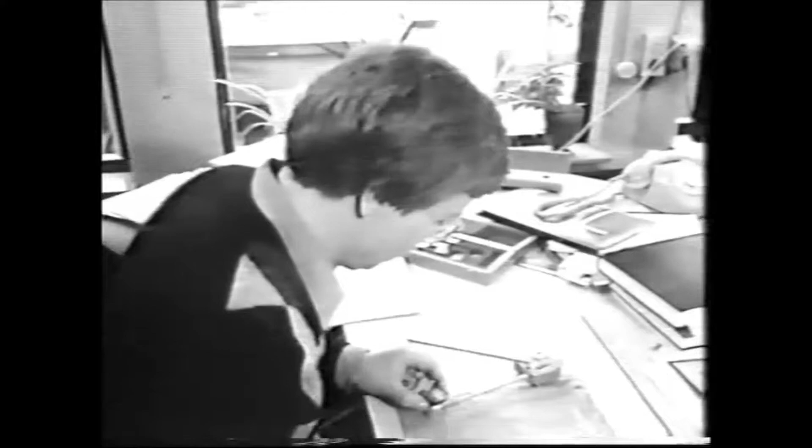In 1983, Daewoo Shipbuilding and Heavy Machinery Limited, whose yard in Okpo Bay on Koje Island, South Korea, is well known for constructing large industrial plants, completed 28 modules destined for a petrochemical plant in Al Jubail, Saudi Arabia. The modules were designed by the contractor Fluor of Irvine in California. Stability calculations were checked and rechecked. Jan, I think the next item on our agenda is your... At a very early stage, too, meetings were held to discuss all aspects involved in the project.

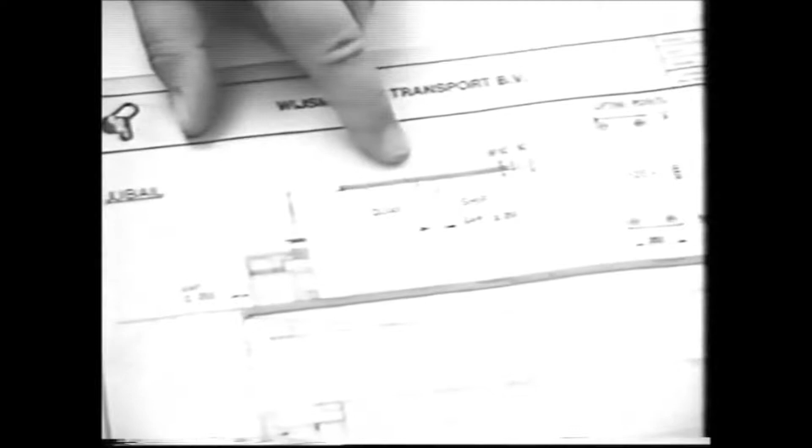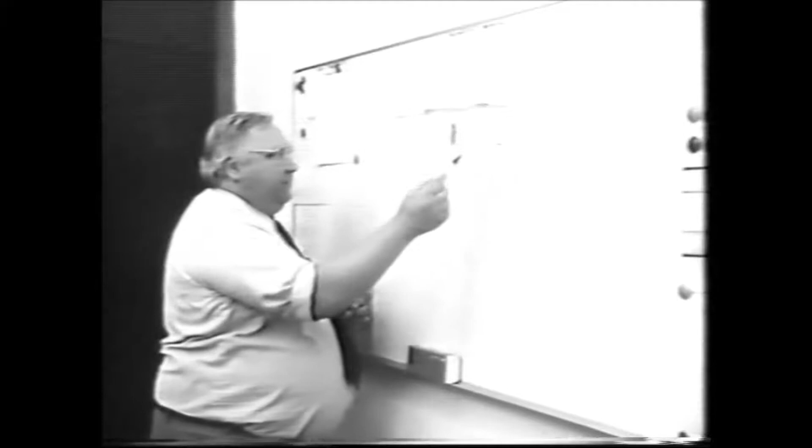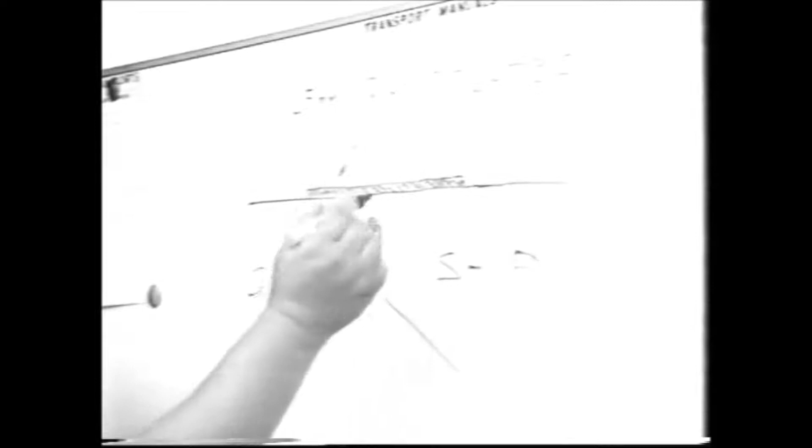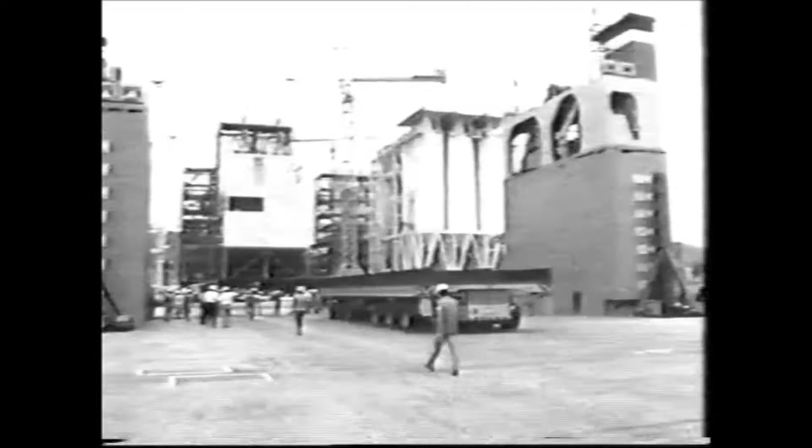Well, actually, it's working very simple. Wijsmuller could use a very simple loading and discharging ramp because of Super Servant's excellent ballasting capabilities. Very simple. Superintendent Jan Arnoudse explains to Kent Goodman of Fluor how this ramp will work. You have the quay, the fender, and the ship. Because of the small gap and the possibility, because of our good ballasting system, to stay level with the quay, we only need 25mm ramp plates, which will be connected to the ship by small steel straps welded to the plates and to the ship. Onto the deck, the transporter can be driven off without delay. Module number 4 is brought aboard.

This was a small film about the first self-propelled heavy lift vessels, submersible heavy lift vessels, developed in the engineering departments of Wijsmuller Group.

But the history goes back much longer, to the 1600s, when we used the so-called sea camels in Amsterdam. Big sailing vessels arrived, waiting to enter the port of Amsterdam, and they used the sea camels, a kind of dry dock connected around the sailing boats, which was then deballasted, and then it could be rowed into Amsterdam and thereafter discharged.

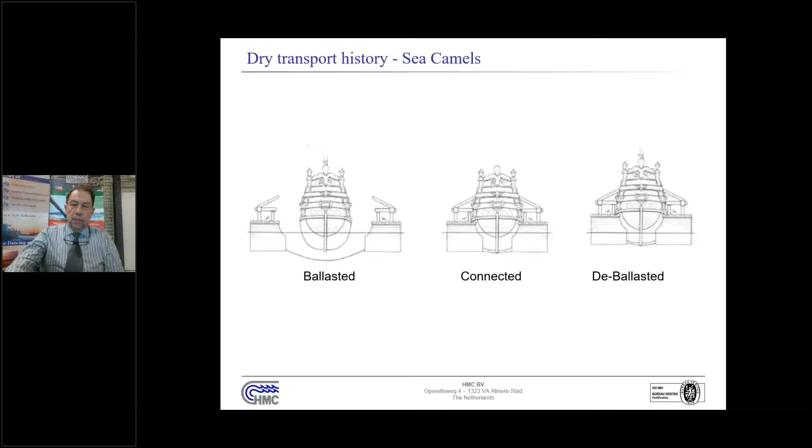That's the reason why ITC from Haarlem developed the so-called bottom reaction barges, and that generation was also called the sea camels. Bottom reaction barges are barges that are afloat, then submerged by ballasting in the stern, and they got their stability while resting with the stern on the seabed.

Then you bring the cargo above it, and you start to deballast again. You get the stability from the waterline in the front and the waterline of the cargo, and then you pick up everything. The picture shows an example of a ship unloader being loaded in this manner. That's the real first generation of semi-submersible barges, but they always had to be towed.

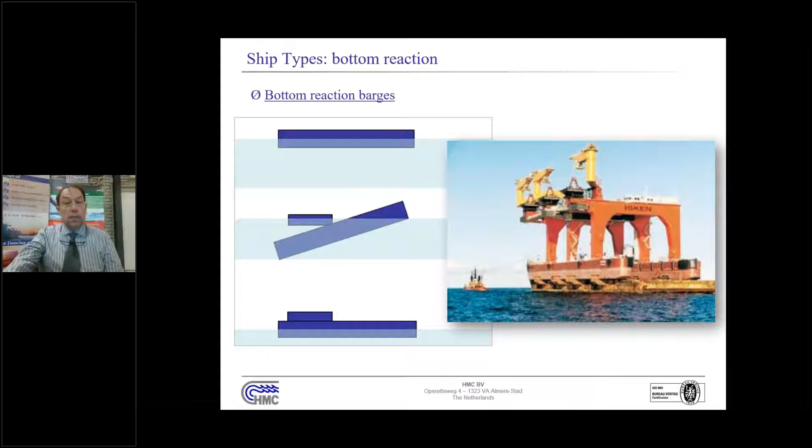Then after that, in IJmuiden, we designed the Ocean Servants. These are barges which had a small propulsion to assist the tug, but they always had to be towed over large distances. In the front you have a big ramp where you could beach the vessel and roll off all kinds of cargo. A special feature was that it had a stern casing and two bow casings, which makes it possible to submerge it horizontally, irrespective of the water depth. That gives a lot of flexibility.

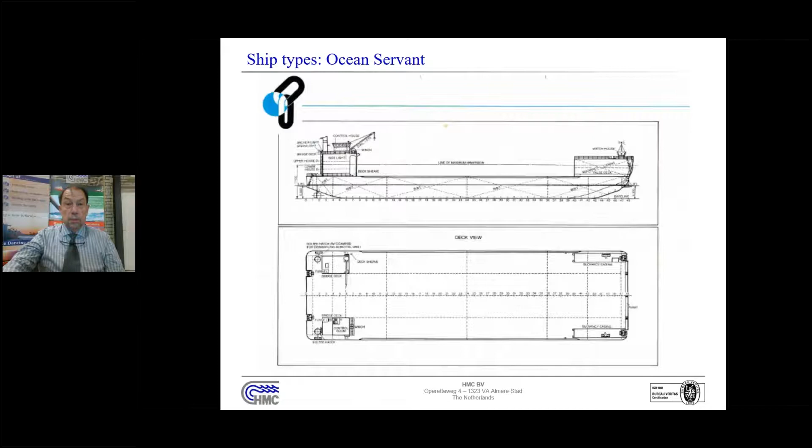After the Ocean Servants, we developed the Super Servants, the self-propelled versions. Among the dry transport carrier types developed after that was the open stern: ships you can reach from three sides, with the bridge on the bow. Then there are, as far as I know, only four built of the tankers. They were used as product tankers when not in heavy lift mode, and in heavy lift mode the tanks would be cleaned and they could carry heavy cargoes.

Next to that, we have the converted tankers and bulk carriers. Those ships were converted to heavy lift ships, and there are still vessels sailing, like the T class of Dockwise, still used as converted tankers. And the fourth type is the dock type, multi-purpose type of ship.

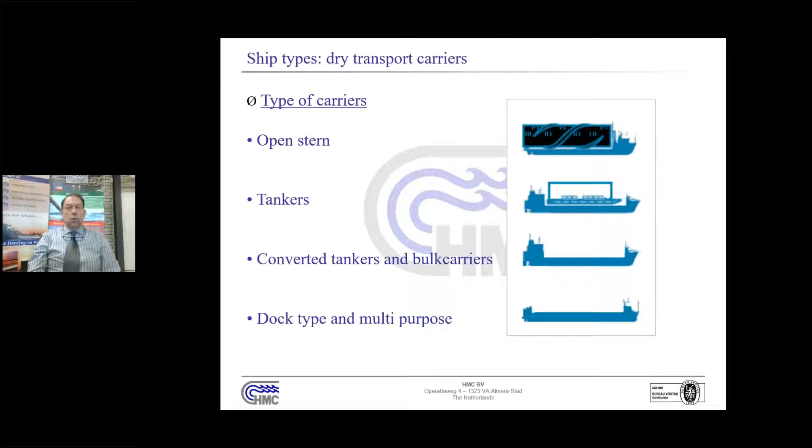This is the general arrangement of the Super Servants. When you submerge, you get your stability from the waterline area at the bow and the two casings at the aft. Those vessels are still operational. The Super Servant 4 is still transporting yachts. The Super Servant 1 is also not demolished yet; it is a rock dumping vessel. So those vessels still have a function in the world.

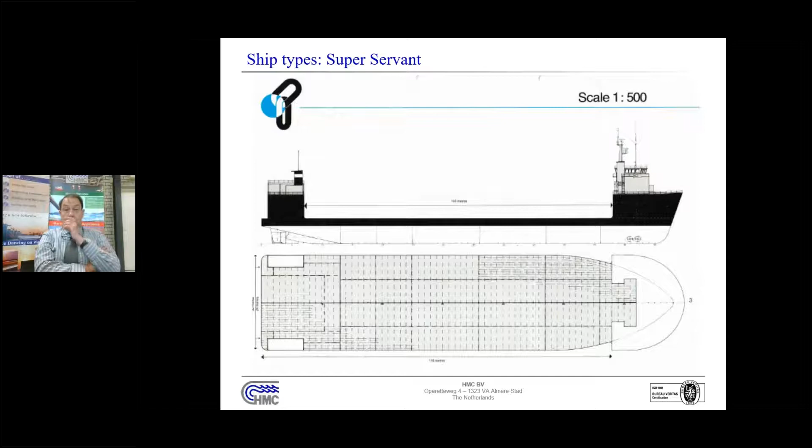After that, we came with the new design, the Mighty Servants, the larger generation. The thinking behind this design, shown on the next page, is that for carrying light cargo you have a U-shaped hull, so you don't need all the deadweight nor the stability, and you have a gentle motion. For real heavy cargoes like gorilla type rigs or semi-subs, you have the wide waterline with a lot of stability.

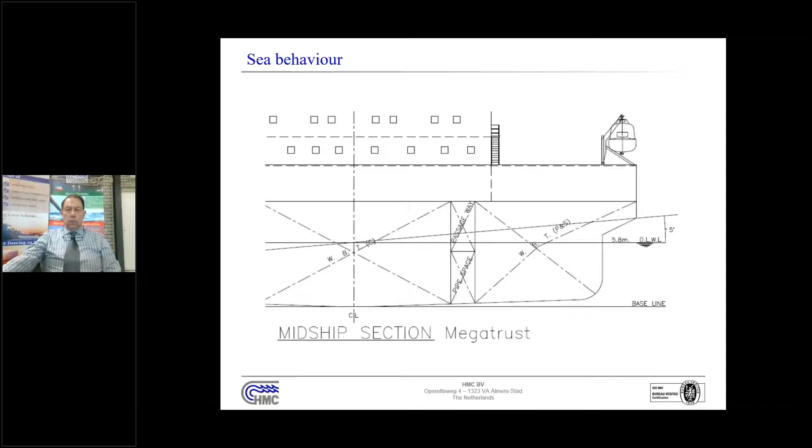Of the Mighty Servants, Mighty Servant 1 was widened and brought back to the U-shape main section. The Mighty Servant 2 unfortunately sank in Indonesia, and only the Mighty Servant 3 is still operational in this shape.

Another type of heavy lift ship is the unmanned barges. This is the example of the Gavea Lifter, operated by Fairmount in those days. That was the highest capacity barge with 50,000 tons of deadweight, and we did a lot of work with that barge using the tugs from the Fairmount fleet. In this case we brought two big rigs from the US Gulf to the Arabian Gulf.

Underwriters are not very happy with the towing. That was also the reason that the self-propelled ships were very popular. In this example, you see the Ocean Orc loaded with a big rig, and basically only these kinds of operations are feasible because you can use the uplift from the cargo, and that contributes to your stability and your stability area.

So basically, for every transport, you have to prepare a transportation manual, which in fact replaces the stability book in that sense. This was also a very nice adventure for myself. It was the CB Venture. It was a converted tanker operated by ITC, and I was sent out by the big competitor Wijsmuller to see how this loading operation, the first one in Quebec, was done and if that was successful.

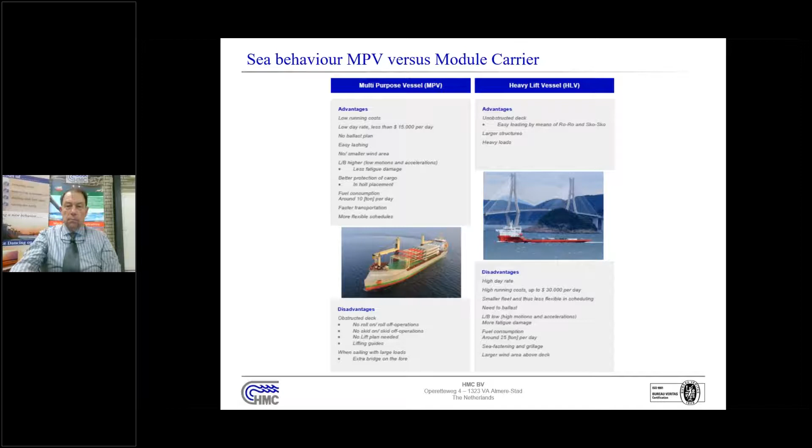In this calculation, for a significant wave height of 4.4 meters, you can see that the multi-purpose vessel has a roll acceleration of a little less than 1 degree per second squared, and the heavy lift vessel is about 6 to 7 times higher, with high accelerations. And those ships with an L over B of 3 come very close to the rule of thumb of the default motions. So I always prefer to do as many motion response calculations as possible, but sometimes we fall back on the default motions.

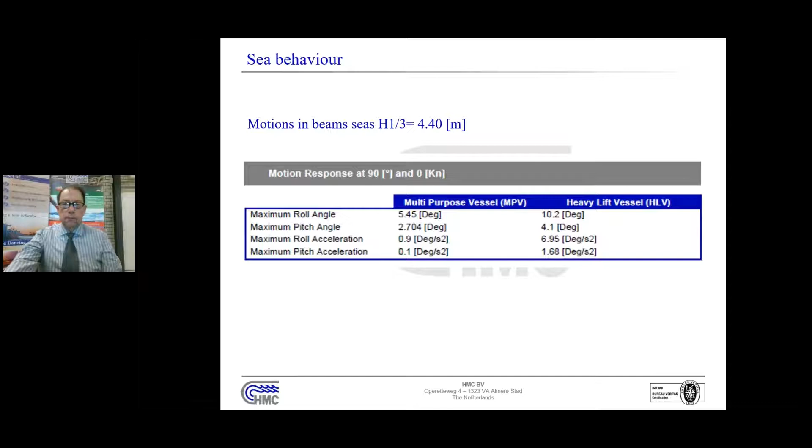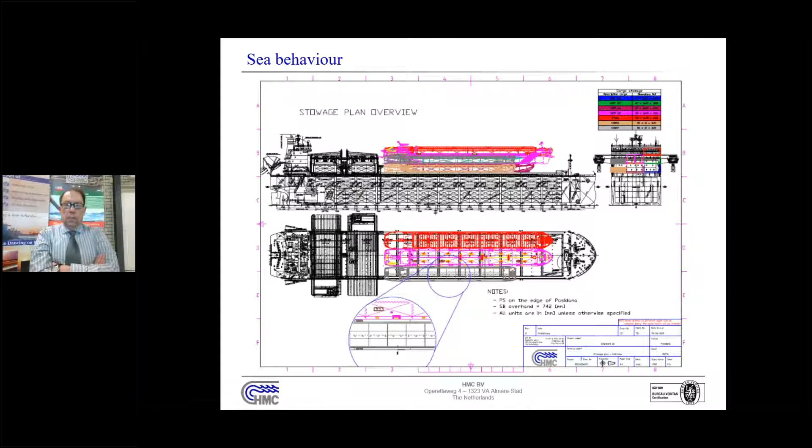Here is another type of transport which we did not last year, but the year before: transportation of cascos, inland hull cascos, on a bulk carrier. It appears that the motion responses were quite okay. In this vessel, we did it in concert with MARIN. We could monitor the motions and follow the ship every day, and those data are still being analyzed. Here you see that the vessel entered Rotterdam safely.

What happened here two years ago: the client normally transports bulk cargo, and they gave us accelerations, especially the roll motion, of 6.08 meters per second squared. Also, calculations were done by IMO class. But if you choose the default rules of DNV, which were based on the Noble Denton rules, basically you're not allowed to use IMO calculations. You can only use that for loads up to 100 tons.

When you do motion response analysis, in this case diffraction theory, we came up with 5.2 meters per second squared. But since the vessel was equipped with a double engine room, you can apply heading control. That means that you can reduce your significant wave height by 60%, and then you come to a motion of 3.44 meters per second squared.

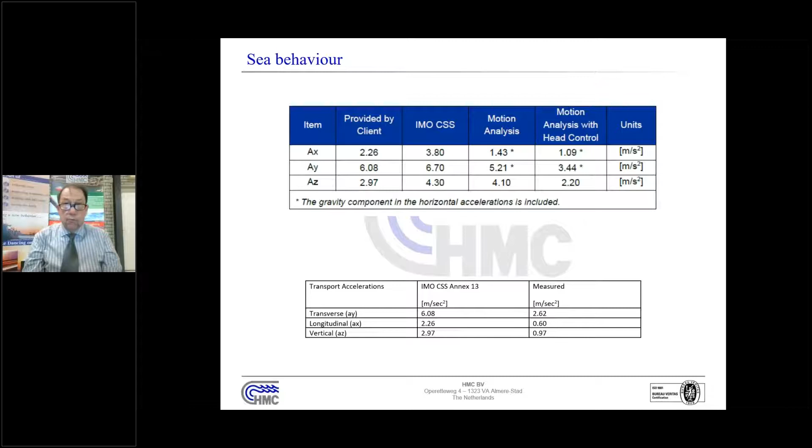As I said, we also measured it, and the whole trip we had a transverse acceleration, combined acceleration of 2.6 instead of the calculated 6.08. And according to our measurements, the roll angle we had during this period was 15 degrees. So it's quite a lot.

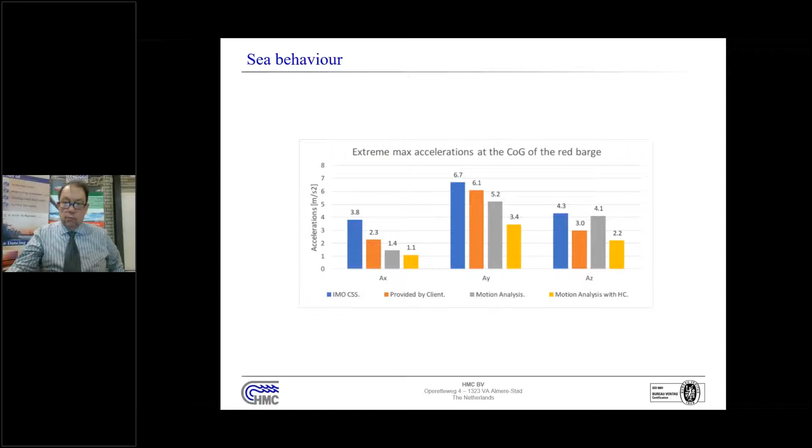We are now working on integrating these environmental conditions with motion responses to prepare a very good safety system to inform the crew more or less continuously.

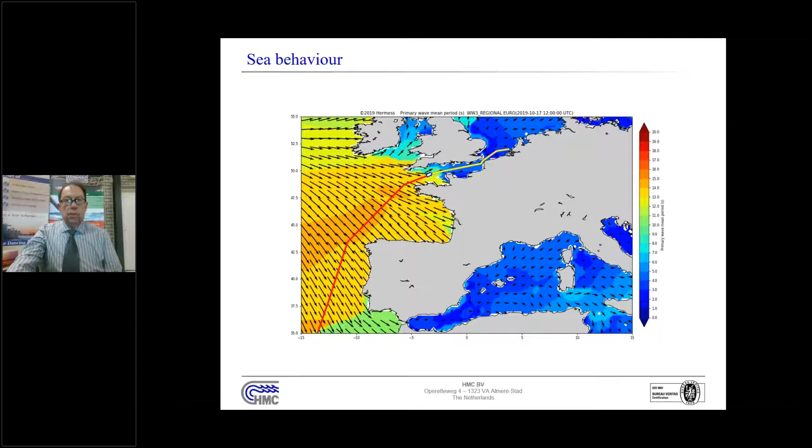Another issue with these kinds of vessels is the structural integrity. The module carriers have a small depth, I always say it looks like a chocolate bar, and you put a lot of concentrated loads on the deck, so structural integrity is a big issue. So what we do is model the ship in finite elements and look at the deflection and the hogging and the sagging.

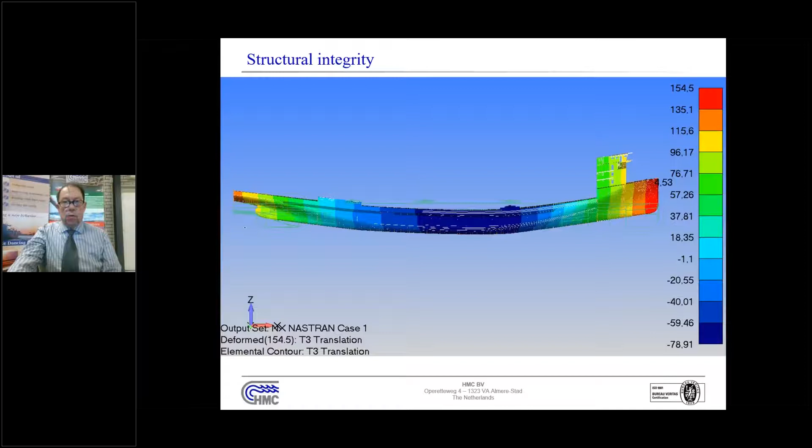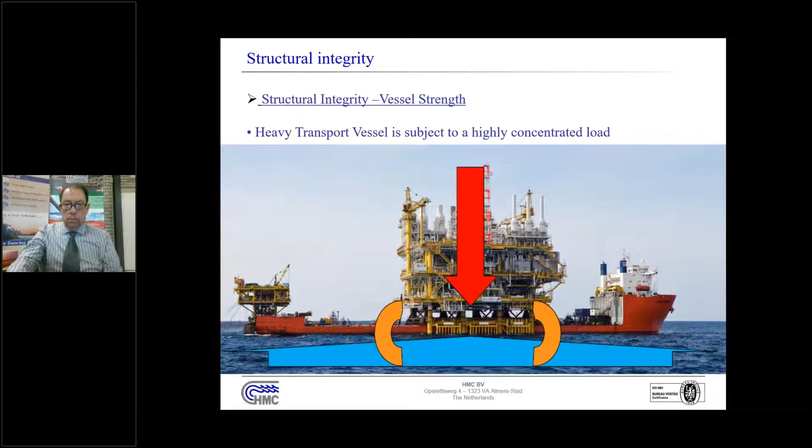If you compare it with, let's say, a merchant marine vessel, a container vessel, where the load is quite nicely distributed over the ship, and the uplift is also very well distributed, the cross section can be built less heavy.

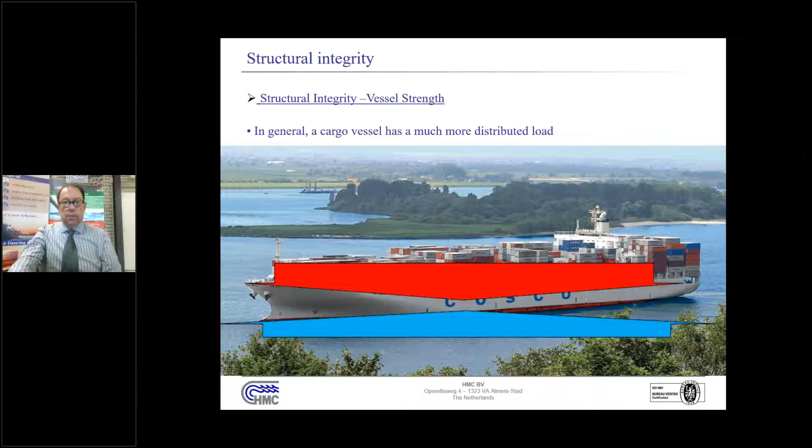So you see that in those stability books designed by regular design companies, they sometimes miss these kinds of things. Or in the case of submersible ships, they just put a block on the ship as a load, whereas it should be more. We often made addendums with jack-up rigs or special carrying modules to show that the vessel is capable of doing this kind of transportation.

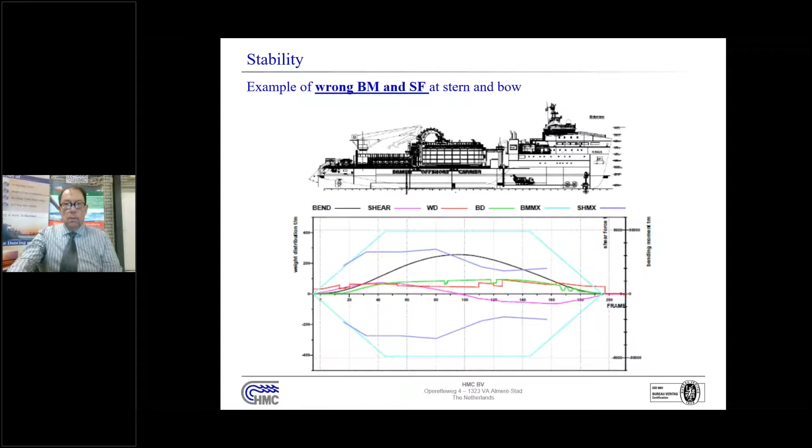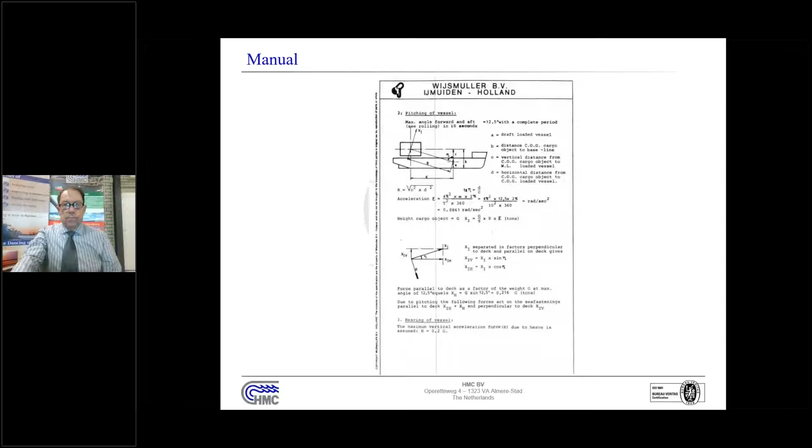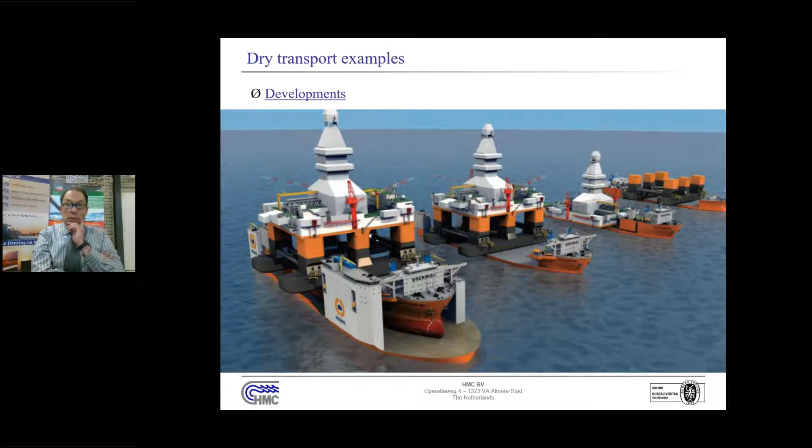And we're developing our safety system for these kinds of ships in order to reduce the risk at sea. Of course, zero risk will never be possible, but we at least try to achieve a very safe operation.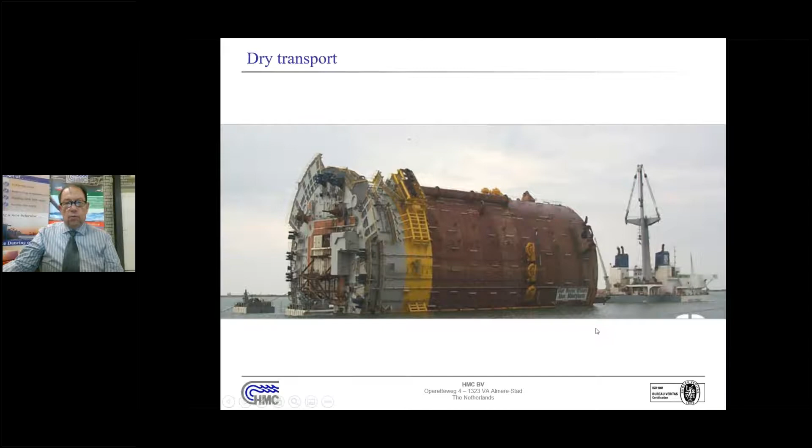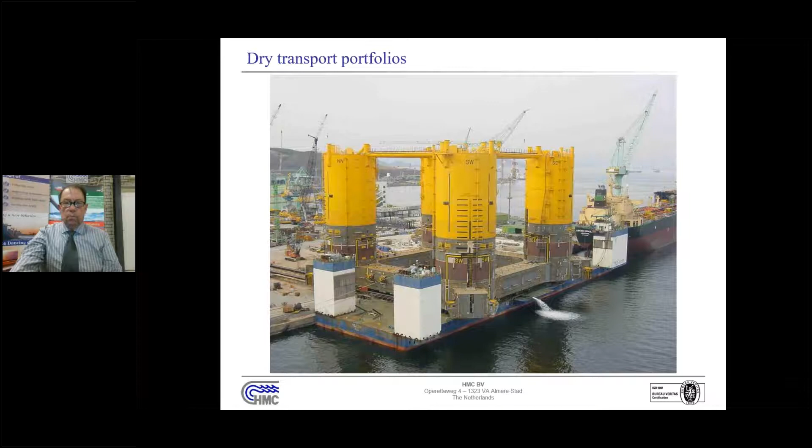Another thing, like jacking off or skidding operations - barges have to have a very robust ballast system when these big steel constructions are pushed on the deck of the ship. What I experience is that ballast systems most of the time only consist of a ballast ring, and that is not always easy to cope with all the rules and regulations for loading these kinds of cargoes by means of skidding. Especially skidding, taking about 14, 15 hours, you have to keep up with tide, so that is always a challenging operation to determine and calculate a very good ballast system for this type of operation.

Another example is loading a jack-up rig by means of jacking down. This was done in 2008, where we had the heavy lift vessel Fjord loaded with a big jack-up rig at the stern. The challenge was that all the load of the rig was on the stern, and we had to take into account the draft restriction at the bow. The vessel was not allowed to sail with less draft than 5 meters forward, to avoid slamming. Loading was done in Kirkenes in wintertime, so we crossed the North Sea and Gulf of Biscay during winter, but we managed to work it all out.